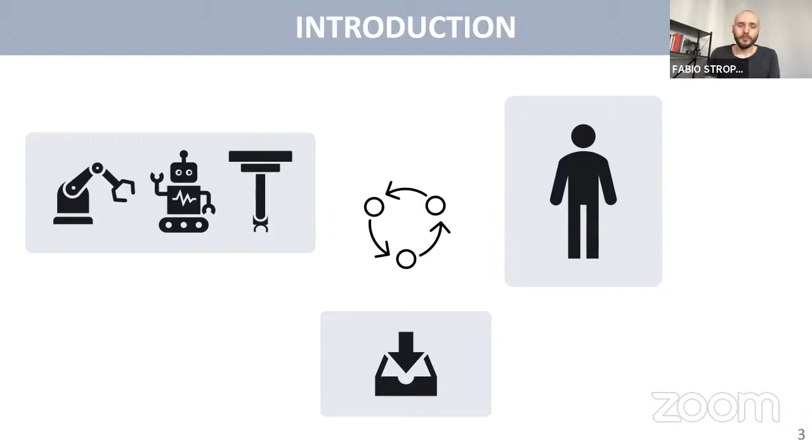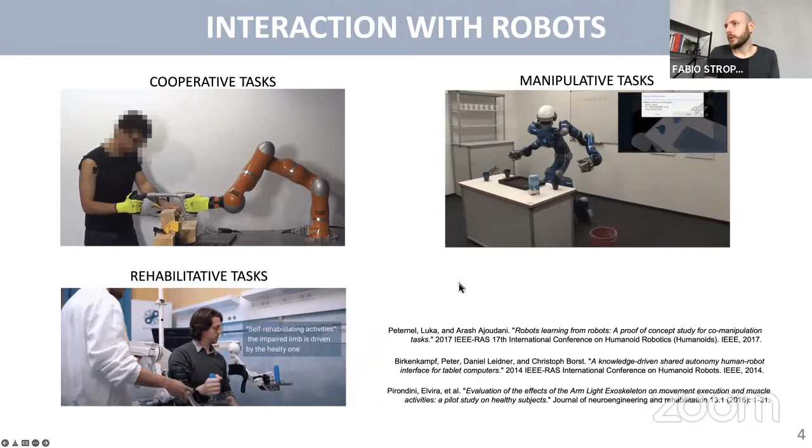Robots and humans can interact in different fashions, as you can see from these videos. The benefits can range from having robots doing chores for us, solving problems, improving search and rescue tasks, or even helping people with disabilities. I don't know if you can see my mouse in this video here, which, by the way, that's the system I worked with during my PhD. But today I'm not going to talk about rehabilitation robotics. I'm going to talk about interaction with soft robots.

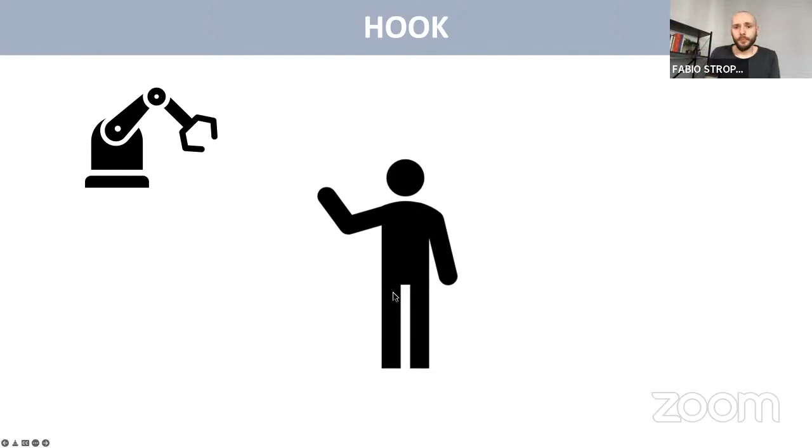Soft robots are a very different type of robot, very different from the industrial robot machines that we are used to seeing every day in movies or in industrial systems. I'm talking about a robot that can grow, that can modify its shape based on the environment, and reach targets in a complex scenario. So how do we make this interaction possible between the human and this robot, and how smart can this robot be?

And also, how do we actually design one of these robots to be perfectly capable to solve a specific task? These are the questions I will address today while I talk about my research to all of you.

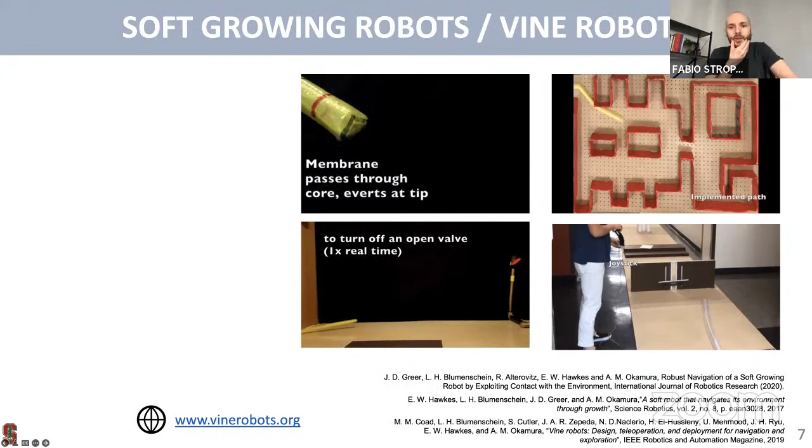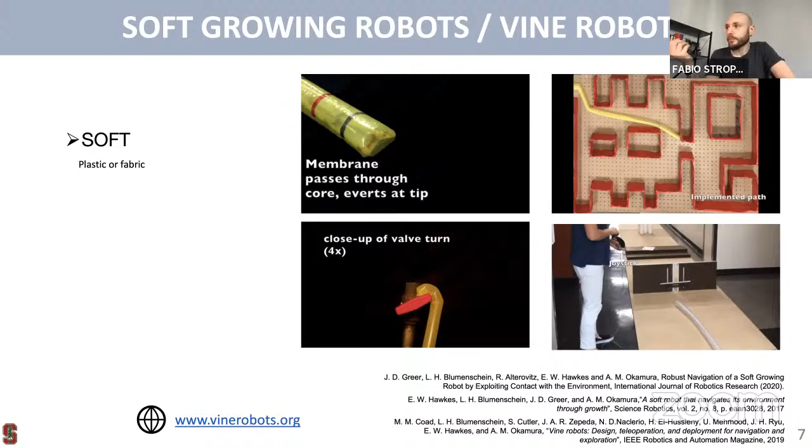First of all, some of you might not know what a soft robot is. Well, it's soft. It's made either of plastic or fabric, which makes it very affordable and easy to build. And it can be of many shapes, as you can see from my videos. But the main feature is the ability of performing eversion.

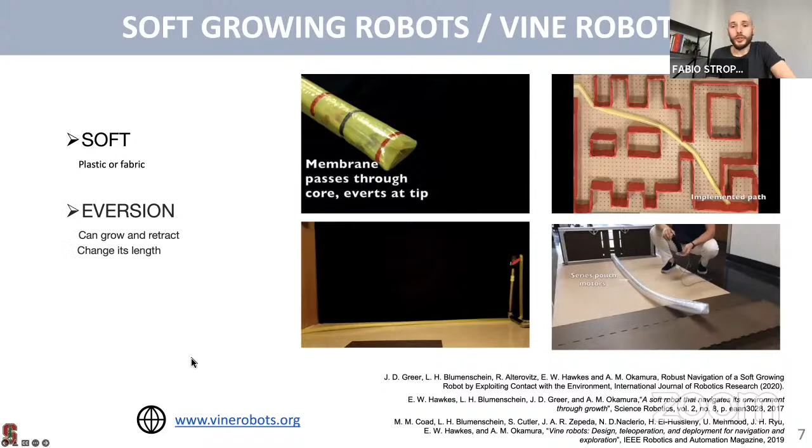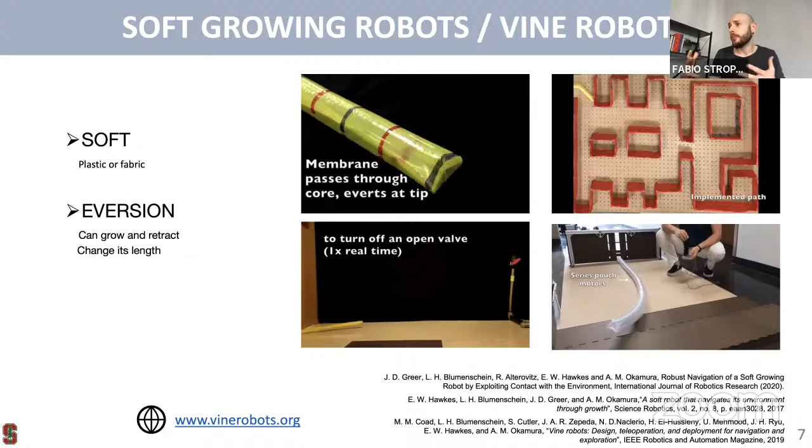Eversion is these robots can grow and retract, so basically they can change their length to explore cluttered environments and perform certain tasks. And of course, being soft, they are also pretty safe for humans. We're talking about human-machine interaction, so this is a very important feature.

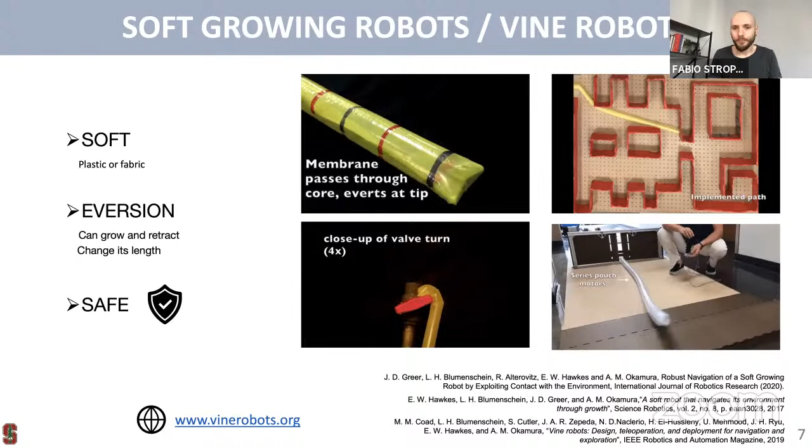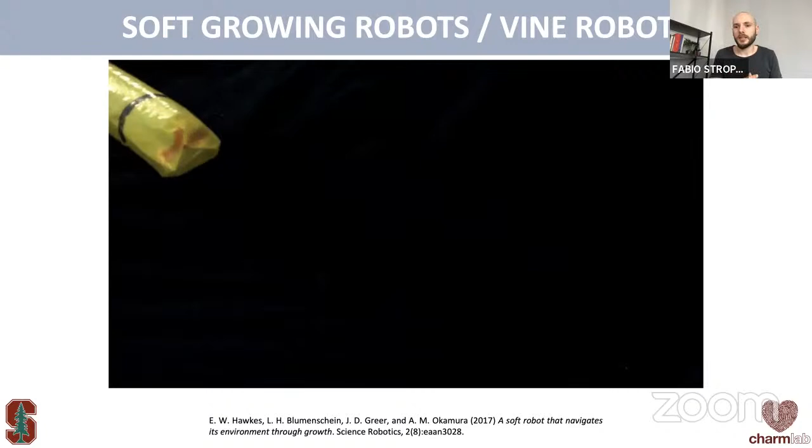Before moving on, I wanted to show you some videos in full screen so you can have a better idea of the capabilities of these weird devices. This is a close-up of how the robots evert, so grow and retract. As you might have noticed from the title of this slide, we also call this particular type of robot a vine robot, because of its resemblance with plants. The idea behind these robots comes from how plants grow in nature.

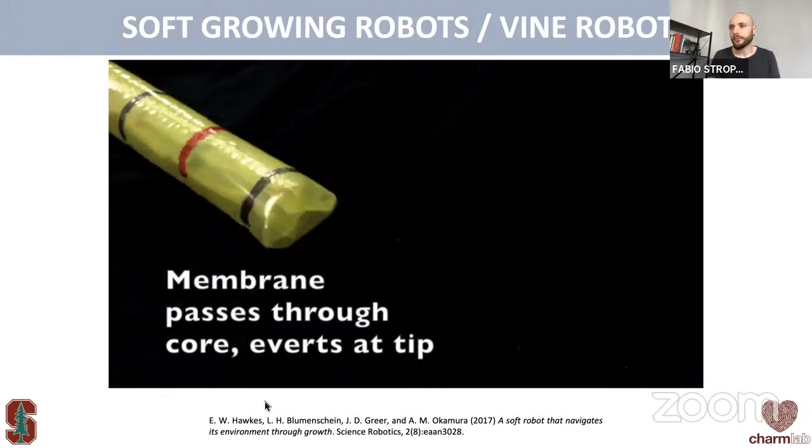I already mentioned cluttered environments. In this video, you can see a robot that is not actuated, which means that when it moves, it is not commanded by motors or by some sort of control. It's just growing and crashes on obstacles and then changes its shape based exactly on the environment. That's how this robot can explore this labyrinth or maze.

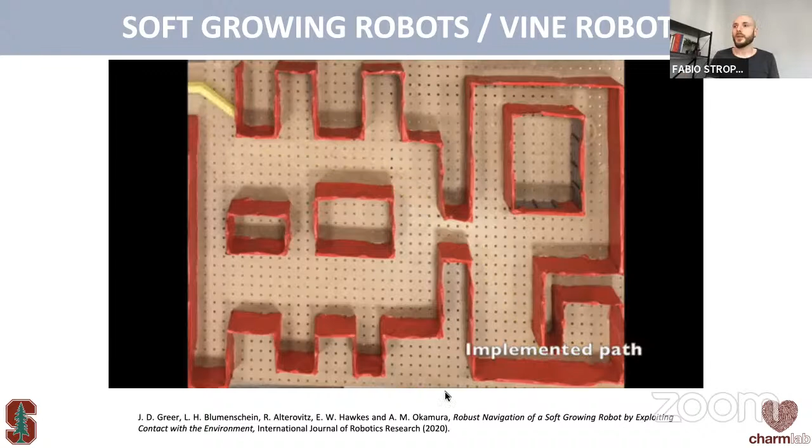Or they can also be used in search and rescue scenarios, like this one where the robot is turning off a valve, perhaps to switch off a faucet during a fire.

Today I will tell you about my work at Stanford University, where I worked in the Charm Lab with Professor Allison Okamura. You might have heard her name if you are interested in robotics or haptics. Most of the projects in Charm involve soft robots, and my role as a software engineer was mostly on developing innovative interaction methods and algorithms based on artificial intelligence. So today I will basically narrate my adventure over there in California, which was a very amazing experience, I have to say.

All the things I'm going to say today are, in order, the evolution of each other, in which different methods are used to make the communication between human and robot possible. As you will see, I gave the robot different degrees of intelligence, but I also provided humans with easy tools to interface with these weird devices.

So the first two parts are very related to human-machine interaction, and in particular on how humans can teleoperate soft robots. Teleoperation means remote control. Imagine when you play video games and you're exploring virtual worlds with your avatar - then you are teleoperating that virtual avatar and exploring a virtual world. But in this case, you are commanding a real device.

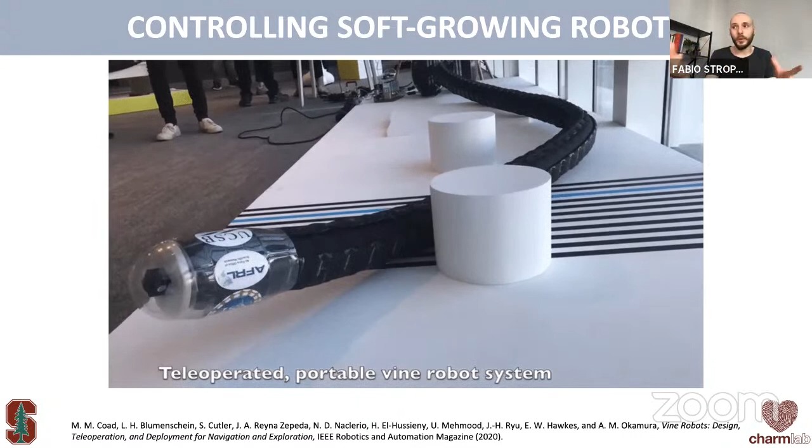So let's jump into the first part: designing control for this eversion. It's very challenging, and I repeat, eversion is the robot's capability of growing and retracting. It is challenging because mathematical models for soft robots are not yet well defined.

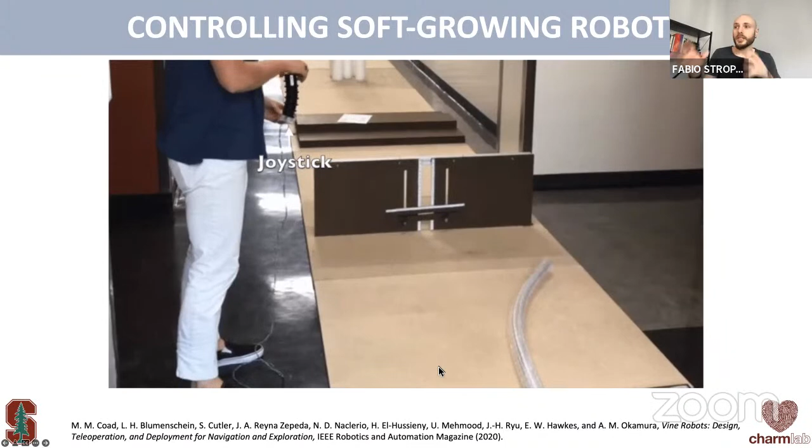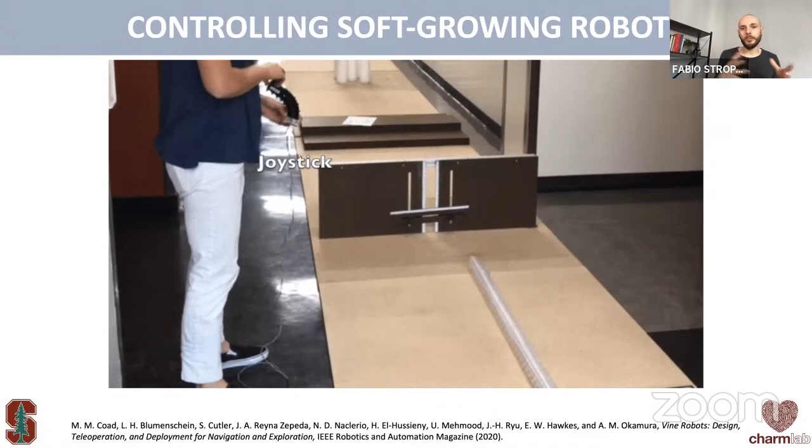As you can see from these videos, soft robotic systems usually rely on humans to operate. However, the differences between the way our body moves and the way the robot moves make it really difficult to find appropriate control interfaces. For example, you can see my colleague here operating the robot with a joystick.

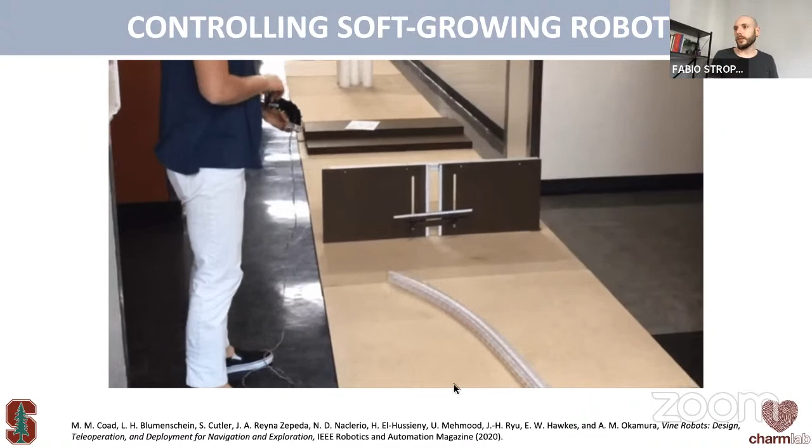So the way I proposed to solve this control problem was to create an interface that allows humans to control the robot simply by using their arm. The gestures of the operator would be tracked by a motion capture system, just like in movies when they do CGI - they record the animation by capturing the movements of actors. In this case, the human operator is the actor, and all these gestures are mapped to the robot for an easy and intuitive teleoperation. I call this interface the body interface, because it's based on the body of a person.

And I used this interface to teleoperate a soft robot while performing a reaching and grasping task, which means aim for a certain target, collect it, and possibly reposition it somewhere else.

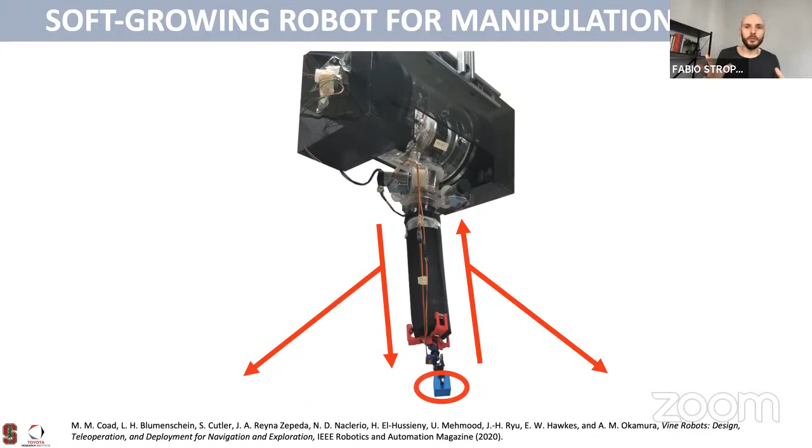This is a picture of the first robot I worked with. It was a prototype, specifically built for manipulation tasks. It can grow and retract, and it can also steer in 3D. I know this is hard to see from a picture, but I have a video to show you later. It can do all these actions while carrying a payload. In this case, it's just a little cube, but imagine we could also hold something heavier than that.

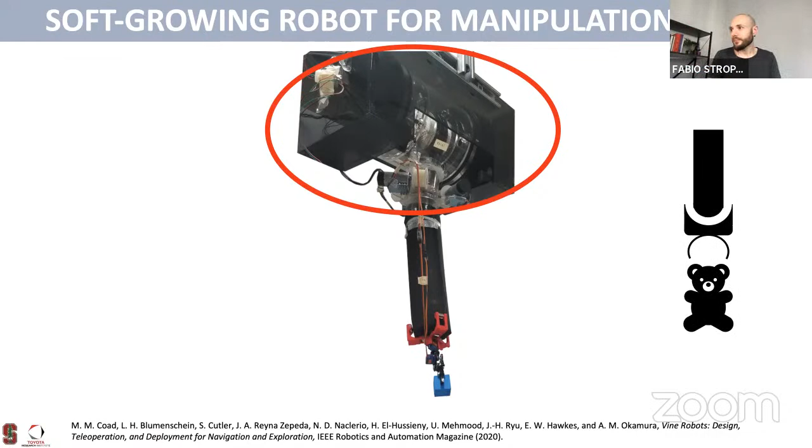This big box on top is where the robot body is contained when it's not grown at all. Imagine the robot comes out from the container and grows in favor of gravity to reach targets from the top in this scenario, kind of like an arcade claw machine you see at a fair. That was the idea we had.

There's a picture of me, that's actually me, wearing the body interface and commanding the robot. But in this picture, I was very close to the robot. In a real case, the operator would be further away, or even in another room or place, because it's remote teleoperation. You don't need to be there.

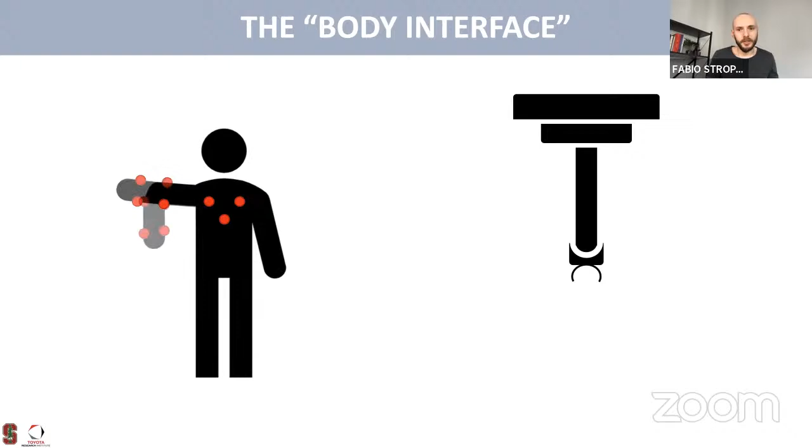So how do I control the robot with a body interface? I wanted it to be very simple and intuitive. If you put your arm down, the robot goes down, and if you bring it back up, the robot retracts. Very intuitive. The same goes for steering. The robot simply mirrors the gesture of the operator, such that you would act as the robot was your own arm, more or less. So all of this seems cool and futuristic, but I know what you're wondering.

Does this work? Well, I was wondering that myself. So as a researcher, I ran a little experiment to test whether this works or not. I asked about 12 participants to come to the lab and teleoperate the soft robot while picking up a block and moving it onto a target. This was before the pandemic, so I had a lot of people coming over and playing with this robot. Good times.

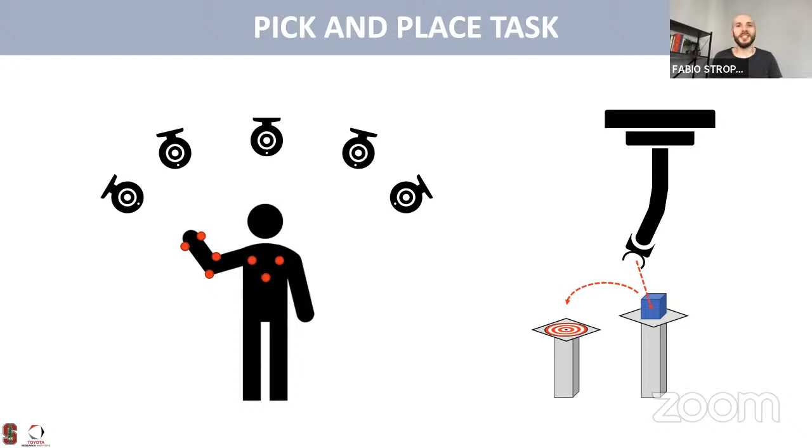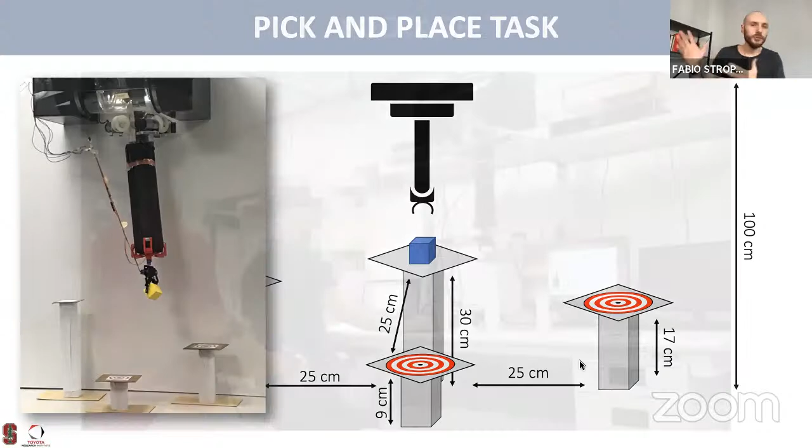So this is a small sketch of the setting. And of course I have a picture, but enough talking, let's just watch a video, which is much better.

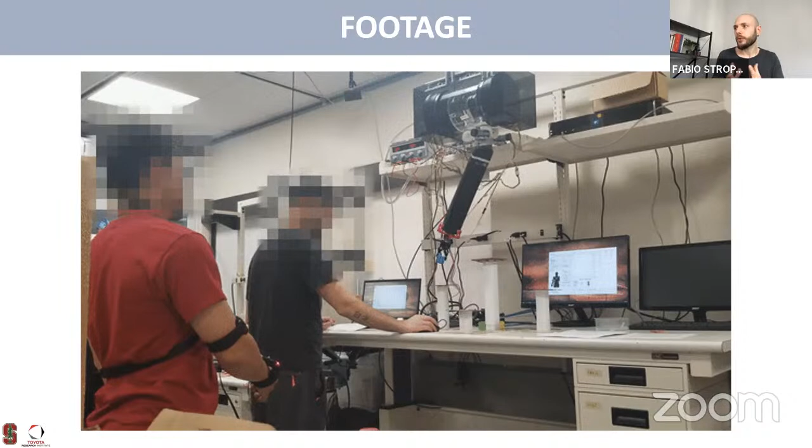And then he drops it. There you go.

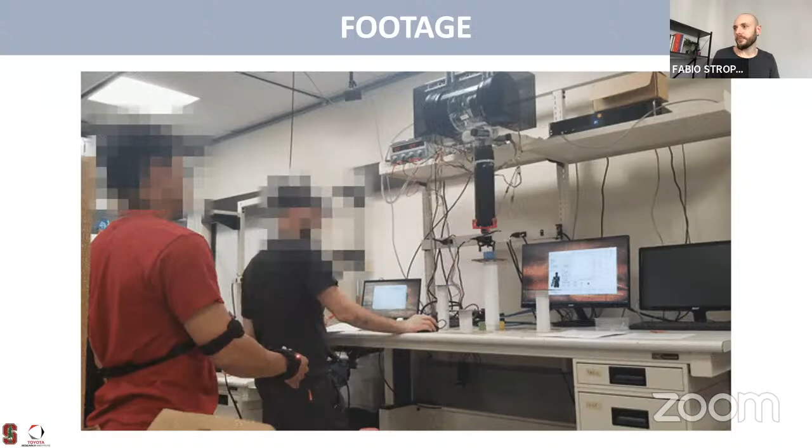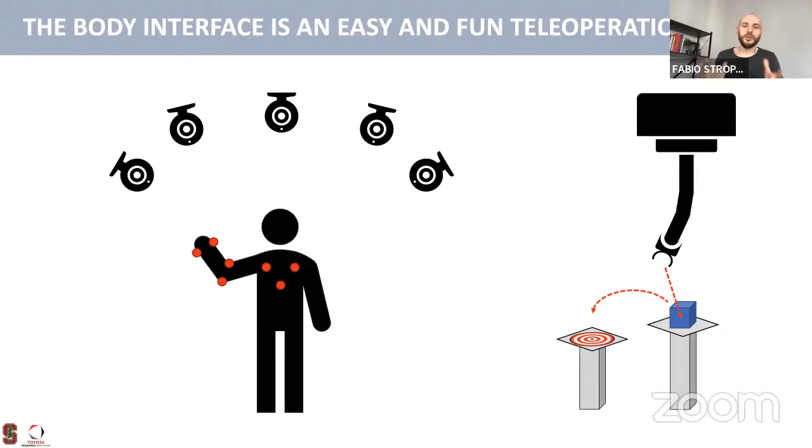Without going too much into the details, because if I showed you plots and charts I might lose you all, and that's not what I want to do, I'll just briefly draw some conclusions about this unconventional teleoperation device. It turns out that the performance of this interface was remarkable: we achieved 97% accuracy while repositioning a target. And most importantly, people were really excited to be using their arm to control a robot.

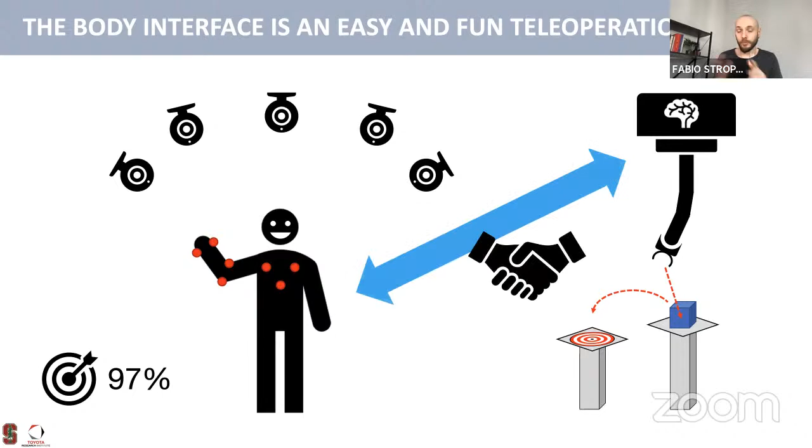So what's next, what's after this? At this point my objective was to make the robot somewhat smart, such that the synergy between human control and autonomous control would help achieve better performance. Imagine the robot can do part of the task by itself, while the human is still in the loop. We want the human in the loop — that's very important, otherwise we wouldn't be talking about human-machine interaction.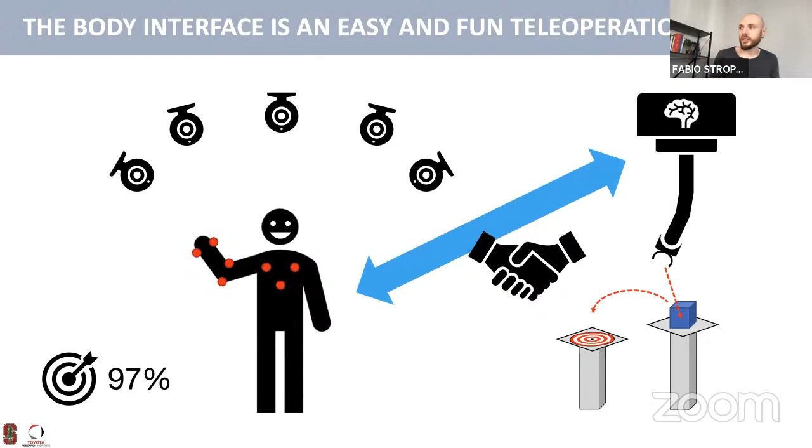Before we talk about that, if you want to know more about this body interface and the robot, this work has been published through ICRA 2020, where I also received a nomination for Best Paper Award in human-robot interaction. You can rewatch a better version of this presentation on YouTube, where I go more deeply into the details and results.

All right, so let's make the robot smart enough to be part of the decision-making. In the next step, control will not rely completely on the human operator, like we've seen in the previous example. When I say control, I mean who is in control of the whole task. When the human is operating the robot, the human is in control. If the robot is a little bit smarter, then the robot can also be in control.

So the control will be shared between human and robot, and that's why we talk about shared control teleoperation. This term, shared control, really is another way to say human-robot interaction. There is not one unique definition, and there are a lot of synonyms. The definition I personally like most is partial replacement of a function carried out by the robot, which allows humans to solve problems that are very difficult to automate. So that's why we have robots and humans together.

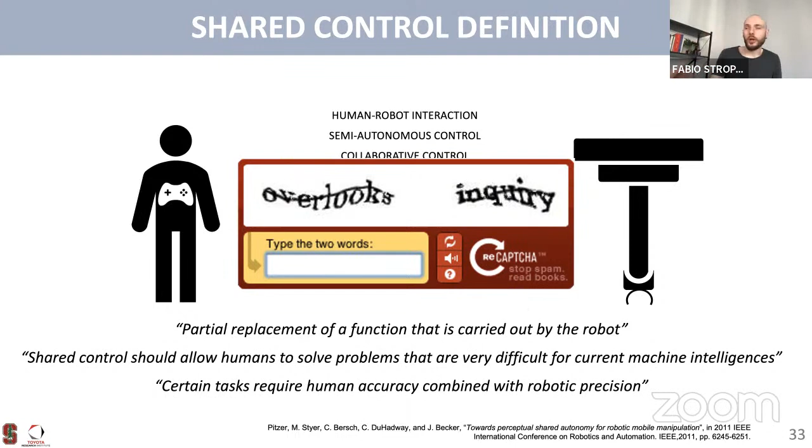But let's go back to the case of the robot. In particular, in my study, what I wanted to do is solve a problem with a soft robot. Let's say, once again, it's a pick and place task, just to keep it simple, not even with the pillars like I showed before, because that's kind of a trick of engineering. So let's keep it simple and complicate it later on when things work.

As you can see from the photo, the robot I used here is actually the same as before, but now I wanted to make it smart. What does that mean? Well, suppose the robot knows where the targets are and where the items are, so it can know what to do because, for example, there are cameras that can track the objects in real time and send information to the robot.

So that's some sort of the eyes of the robot, right? And let's also suppose the robot is so smart it can actually tell you where to go, or even better, suggest where to go. So how can we do that? How can we make this communication, this human-machine interaction?

Well, we can make the robot talk through some speakers, for example, but that might be confusing. Imagine the robot tells you to go left, and then you think, okay, is it my left or your left? That kind of depends on where you're looking, where you're standing. Yeah, that's confusing. Let's discard that option.

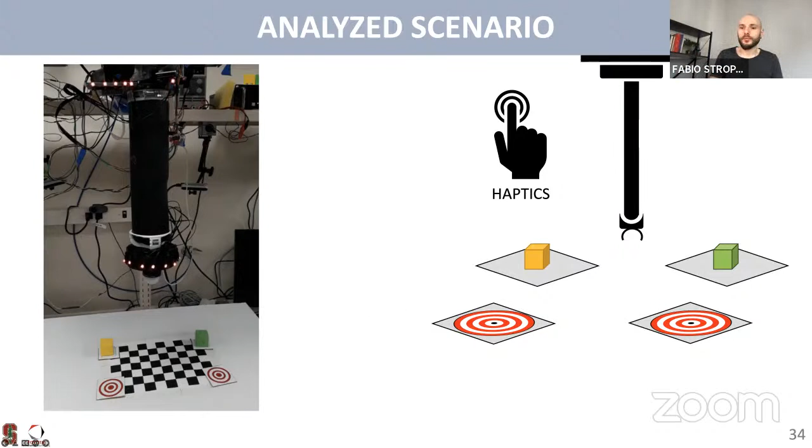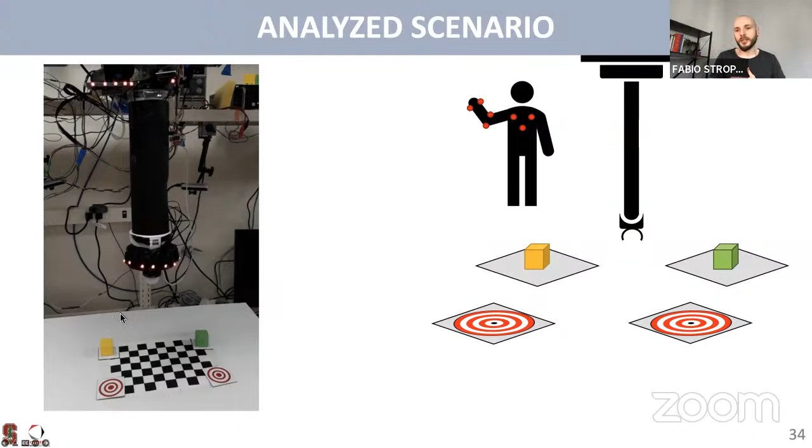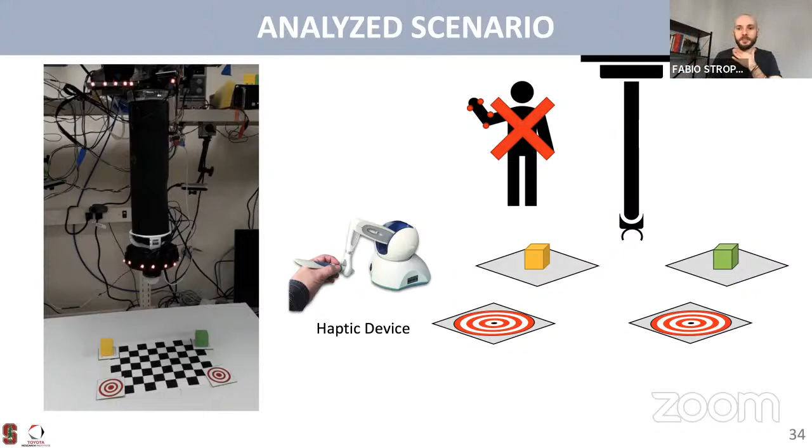Unfortunately, the body interface that I showed you earlier did not have any haptic feedback, and rather than adding more sensors to the interface, which I tried, in the end I decided not to use the body interface because it was too complicated. Instead, I used a classic teleoperation device, this one called Phantom Omni, which is capable of generating haptic feedback. It's a haptic device, so literally it can generate forces that push you in a certain direction. We can use those forces as a sort of guidance during the task.

I also have another type of gripper, which looks like a bubble gum. Of course, it doesn't work with magic, but it works with magnets. There are magnets in the little cube and also inside the gripper, and as the gripper inflates, the distance between the two magnets increases enough to not generate an attraction force that would keep the objects together.

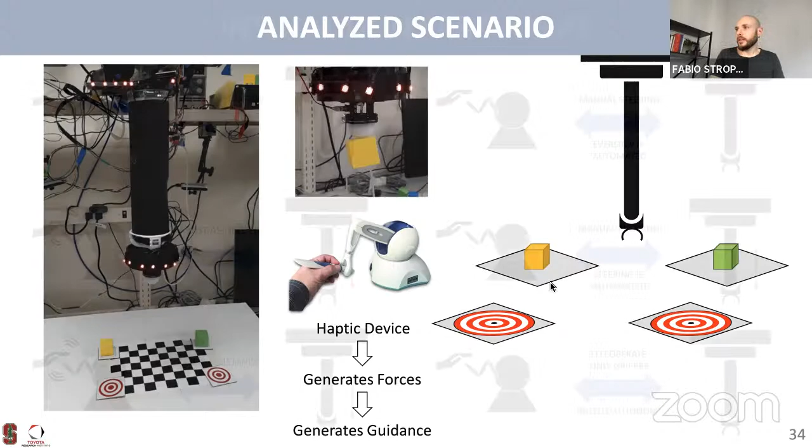So we decided to use haptics. We decided to make the robot smart. And concerning how humans can interact with the robot, let's call them interaction paradigms - how many ways are there to implement shared control? Well, it's kind of really up to one's fantasy; you can implement many cases. So I had to narrow it down to a finite number, and I chose six.

First of all, I had full teleoperation, normal teleoperation where the human controls everything, tells the robot where to go, and the robot is not smart. Of course this is not shared control, but I use this as a baseline for benchmark comparison with the other paradigms.

Then there are two with haptic feedback, which I just discussed, in which the robot pushes you towards the right direction. One paradigm is fixed assistance, where the robot never leaves you alone, always tells you where to go. The other, which I think is more interesting, is the so-called assist-as-needed paradigm, which comes from rehabilitation, in which the robot produces these forces only when you need them.

So let's say the robot also understands that you're not doing that well, maybe going in the wrong direction. As soon as it understands you're doing it wrong, it pokes you a little and pushes you, saying this is the right way to do the task. Then when you start doing it right, the robot stops helping you.

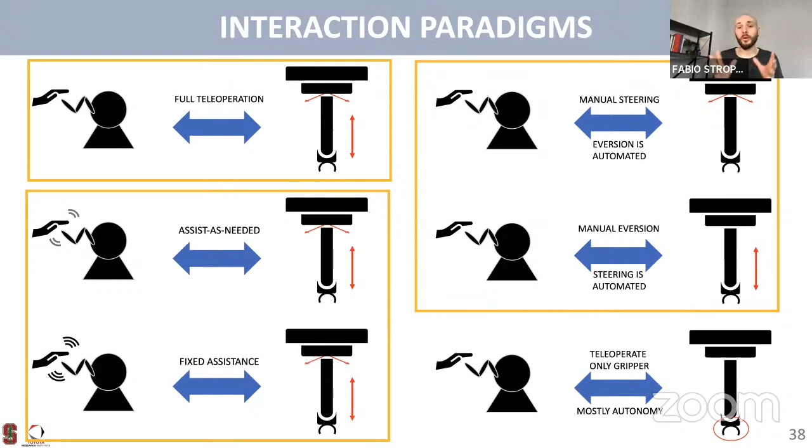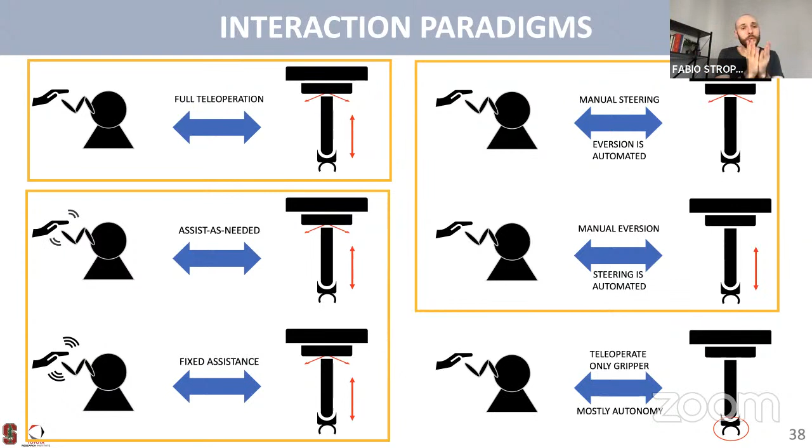Then without haptics, going more towards automation, there are two paradigms specifically built for soft robots. What I did is split the robot's directions of movement, which are steering and eversion - we call them in technical terms degrees of freedom, let's call them directions. I split those two directions and gave only one of them to the human operator.

For example, in this paradigm the human controls only steering, and the eversion is actually controlled by the robot, automated. The robot does that. The other one has it the other way around - the human operator only controls the eversion, tells the robot when and how much to evert, while the steering is done automatically by the robot, because again, the robot knows where to go.

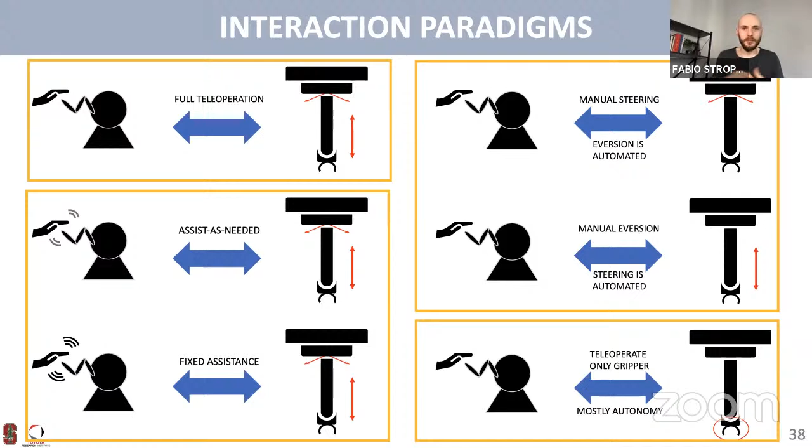And then in the end, the very last one, I implemented a mostly autonomy scenario, in which everything is automated except for the gripper, which is controlled by the human operator. So actually only the release of the gripper, because the grasping, since it's based on magnets, is automatically done by the robot.

The reason I did not consider a fully autonomous system is because I wanted to keep the human in the loop - that was the most important thing. Because if you think about more advanced scenarios, human presence can be a strict requirement. For example, think about surgical robots or assistive rehabilitation, in which you have a patient who cannot move their arm, and the robot pushes the arm. If there is no patient, there's no task for the robot. So we need to have the human in the loop.

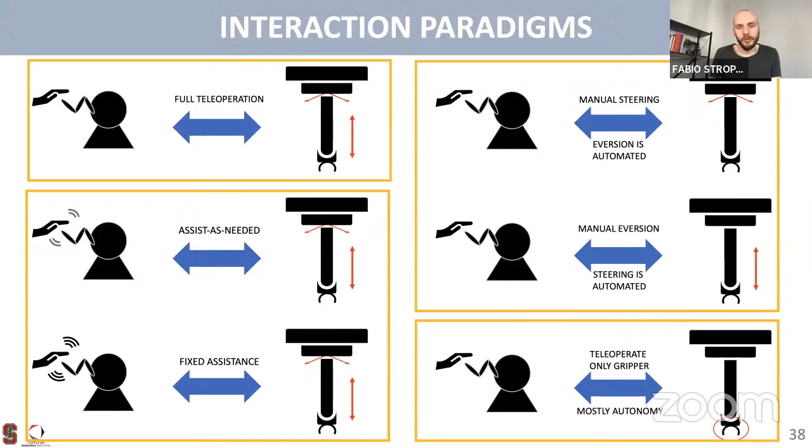So if we define a shared control spectrum - all the possible outcomes of shared control - in which we have full teleoperation on one side and a fully autonomous system on the other side, we can place the paradigms I just showed you in this fashion, moving towards automation. We have a fully teleoperation system, which is outside the spectrum because that's not shared control. Then we have a little bit of assistance, a lot more assistance - there's always assistance there. Then we have partial autonomous control of the robot's degrees of freedom, and finally, a mostly autonomous scenario where almost everything is autonomous.

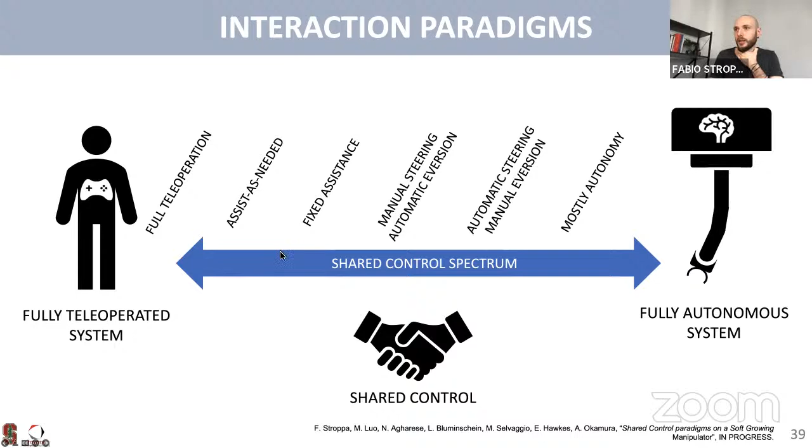So again, enough with words. I have a video of the execution in full teleoperation. As you can see, the hand that interacts with the robot actually moves, and the robot replicates the same movements of the hand.

I just want to show you that. The gripper is also controlled by the human. Everything is controlled by the human.

In the next video, I have the mostly autonomy paradigm. You might notice that the robot is moving by itself without the operator sending any command. I try to stay still here so you can see what's going on, except for the gripper. If you look carefully, you'll see that the hand of the operator is pushing a button on the interface, which releases the item. I won't show you the other paradigms because without feeling the haptic feedback, you wouldn't appreciate the assistance, so that kind of defeats the purpose.

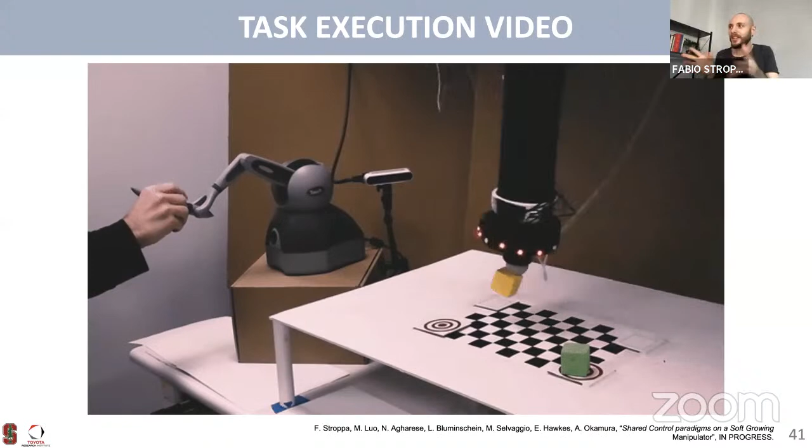As usual, as a researcher, I ran a small set of demonstrations with a small number of participants because we were in a pandemic. Without spending too many words on every single outcome, I just want to point your attention to what I believe is an interesting finding.

But what this data also told me is that the feeling of interaction decreased with autonomy because the human was less involved. So yes, it's cool to see a robot performing the task, but if you want to be in the loop, you also need to have control over it. It's important because sometimes robots can make mistakes, and humans can make mistakes too. So it's kind of a trade-off.

I will submit this publication tomorrow to a journal. So let's keep my fingers crossed and hope for the best.

The last topic I wanted to talk about is, as I already said, not much related to interaction, but I think it's a fascinating example of how we can use artificial intelligence to build and design our personalized soft robot.

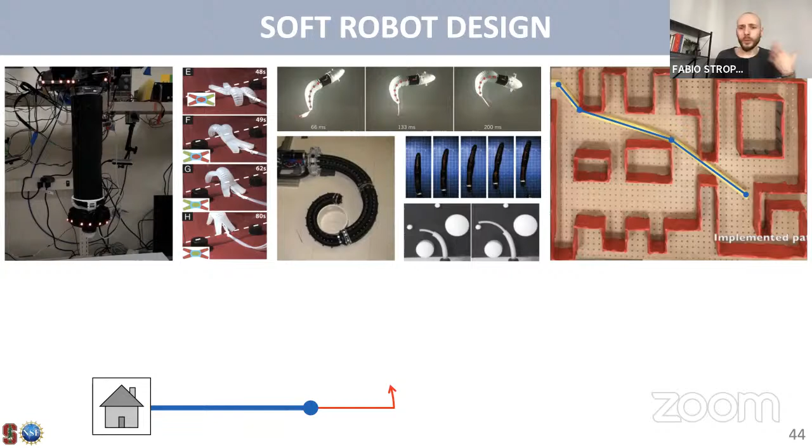We have our soft robot container, and pressurized air makes it grow, forming a segment. Then we reach a point where we place the joint, and we can bend the robot at this angle. We keep going until the robot is fully grown.

So the design of this soft robot, using the technical term 'design,' is defined as a set of links with different lengths, like in geometry. Link, link, link, with different lengths.

This is not too much different from any other robot, if you know a little bit of robotics and kinematics. But the very specific part of this robot is that they can grow, they can evert. This means that the end of the robot, the tip - this is the tip, this is the end - we call it end effector, but let's call it tip for today.

So the tip of the robot can be placed anywhere in this segment because they can grow, right? Imagine the robot goes and it stops growing here. So you have a wide range of points where the end of the robot can be.

And that's the difference between this kind of robot and the industrial robots that you see every day. So during fabrication, when you go in the lab and want to build your own soft robot, you can place these joints following the design. You want to make a segment of 1 meter, for example, and then you put a joint. Then you make another segment of 0.5 meter, and then you put a joint, and so on. I will not discuss how we make joints because I'm not a mechanical engineer, I'm a software engineer. So I will talk about how we get this design.

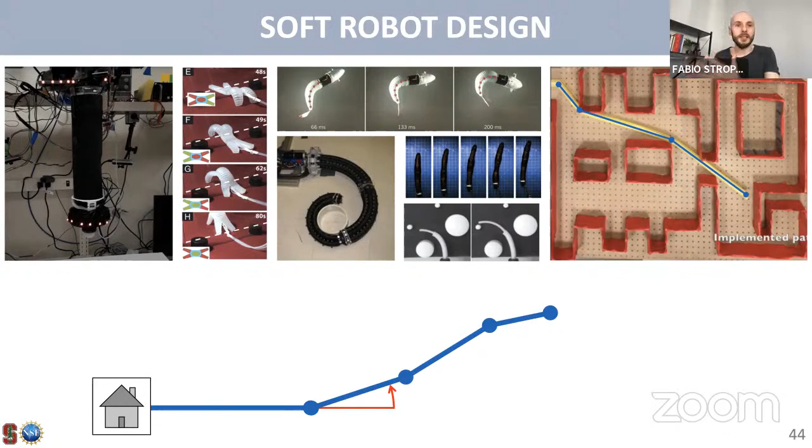Well, that's actually one of my research objectives: to create a tool to optimize the design, to get the best design of a soft robot to reach a given set of targets with a given orientation in an environment, let's say with obstacles. So what we need is to find the length of all the links such that you can fabricate the perfect robot for this specific task.

So how do we get this design? Well, we need an optimization tool - that's how we call it, optimization tools. And my favorite one is genetic algorithms. If you're not familiar with genetic algorithms, well, they are specific search algorithms which are part of artificial intelligence, by the way.

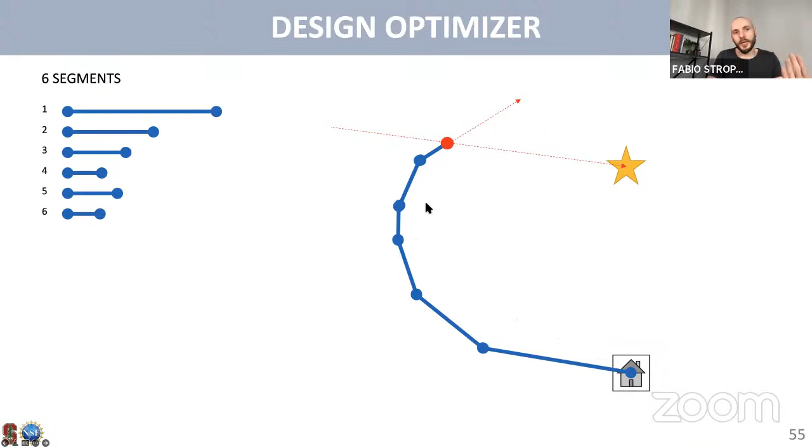This is the best solution. So imagine that this algorithm iterates on several generations, and your solution will get better and better every time.

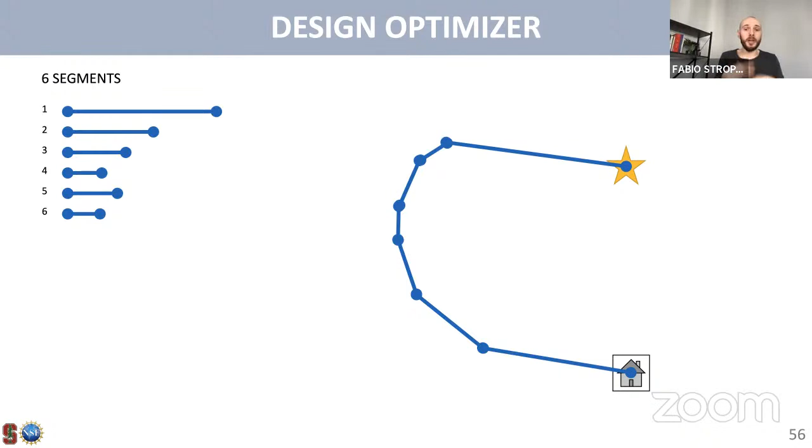Yeah, of course, there's much more into it. What I want to do is to minimize a lot of things altogether, a lot of matrices, or actually maximize the distance between the obstacles such that you don't go inside an obstacle.

But I just wanted to give you a little introduction on what I am doing right now and how we can apply this artificial intelligence search algorithm to build soft robots. These are some results that I obtained with my optimizer.

So again, I hope that with this brief example, I gave you a clear glance on how we can use optimization tools applied to a real problem to build, in our case, a soft robot, an efficient soft robot. So yeah, with this, I conclude my presentation, and thank you very much for listening. I would be really happy to answer your question if you have any. Thank you.